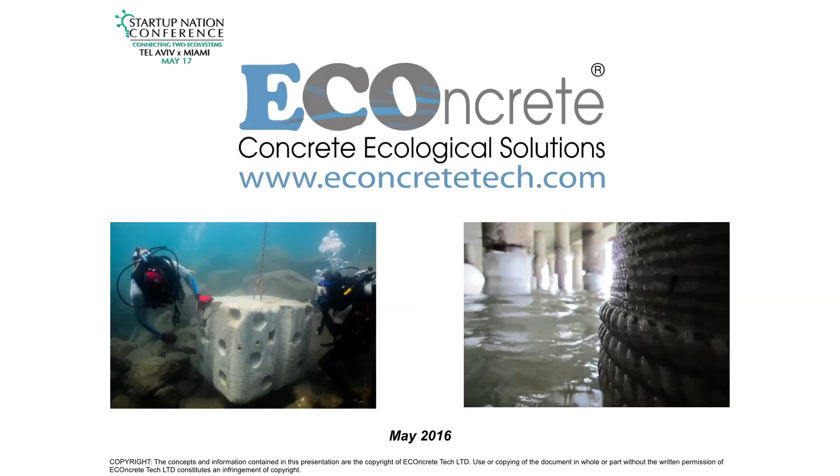So what we do, we are marine biologists, environmental engineers. My last company was Tel Aviv University. We all came straight from the lab, finished our PhDs in marine biology, working underwater in the lab. So we have no experience in business development. We opened the company, didn't have any clue about concrete, and we got into concrete completely by accident.

What we do is develop a technology that can harness natural processes for creating coastal infrastructure, which is concrete-based, that is more resilient and stronger, getting stronger with time, and actually acts as a natural reef. And we'll start with a short biology lesson.

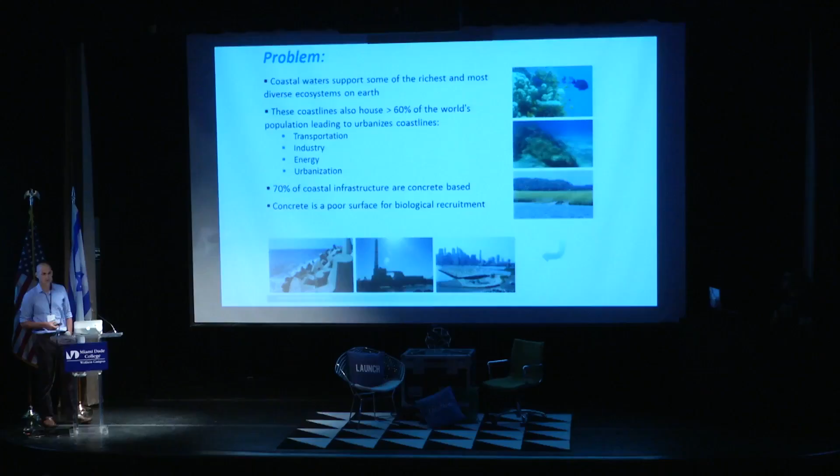So coastal water is the most rich and diverse ecosystem in the world. But 60% of the human population is living along the coastline, and they require infrastructure. And 70% of coastal infrastructure, if it's ports, if it's jetties, if it's breakwaters, if it's seawalls, is concrete-based. And concrete is a very, very poor surface for what we call colonization of marine organisms. And this takes us to two problems.

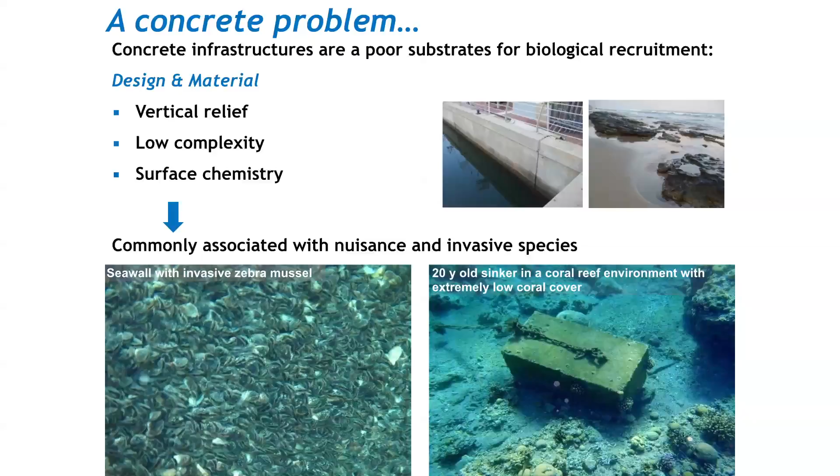One is the chemical properties of concrete are very basic. The pH of seawater is 8. The pH of concrete is going up to 13, which means that the little baby coral that swims in the water and touches the concrete surface is actually getting burned. And it's taking concrete something like 60 years to lose this basic surface and to start to promote biology. And that's the reason we only see biology, a healthy environment, developing on concrete surfaces only after a lot of years. And we usually see two options.

One of them, which is very typical, is what you see here on the right: a concrete cube that stayed in the Red Sea in front of the Marine Lab in Eilat in Israel for more than 20 years in the water. And it looks like someone put it in the water yesterday. And this is not an ordinary environment. This is the highest biodiversity in nature. Sorry. And it's just not getting covered by corals because they could not stay on the concrete.

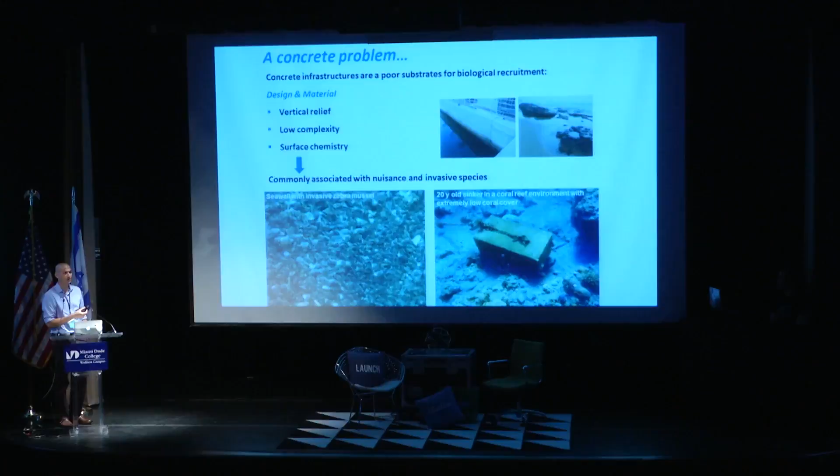On the other hand, what you see here is a seawall from the Great Lakes, the place where we are testing our technology, and they have an invasive species problem. And these zebra mussels are actually covering every surface. So nobody can sit on concrete unless you're strong enough, and invasive species, those are species that penetrate into the environment and make use of surfaces which are not occupied by other species. So the seawalls there, which are concrete-based, get completely covered by this zebra mussel, which creates huge damages in cost for infrastructure.

So what we do is we develop a technology that can modify the chemical proportion of the concrete and make it suitable for colonization of biodiversity and a lot of species. And those species, what they do is they put their skeleton on the surface of the concrete, and they actually create a reef, a biogenic rock that grows on the concrete and encapsulates it and protects it with time.

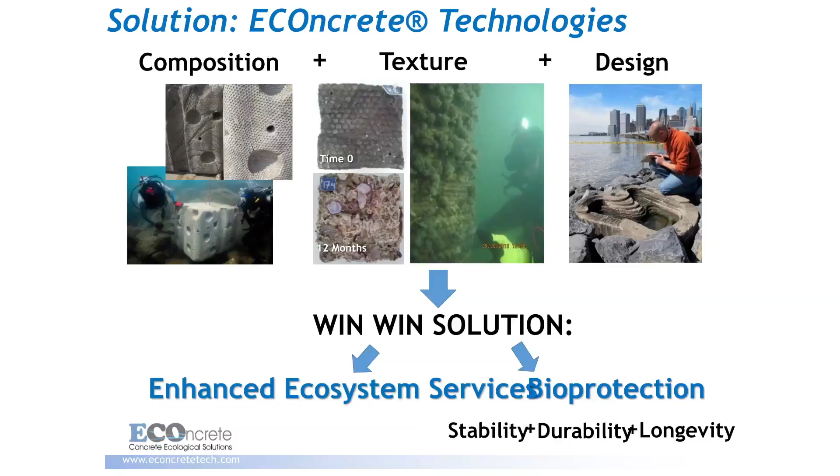What we do is we address issues of composition of the concrete, the texture surface, the microtexture of the concrete, and later on also design. So we get to a system or infrastructure that has enhanced ecosystem services, but at the same time has bioprotection capabilities. We're protecting the infrastructure with the biology.

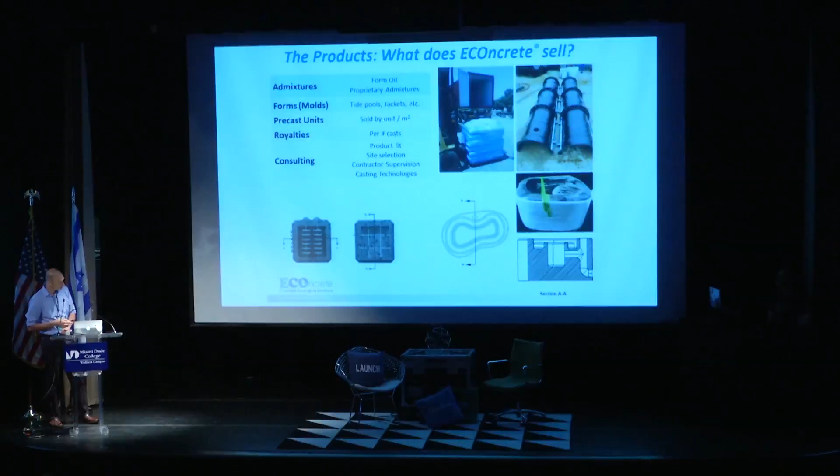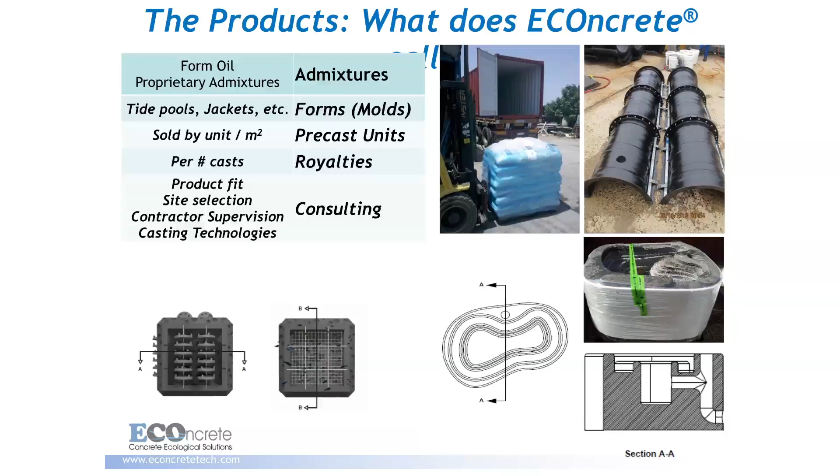Our business model is straightforward. We add salt and pepper to the concrete mix that change the properties of the concrete. We're not affecting any of its structural performance. We work with the clients and we get them the forms or the precast units themselves, and we're involved in consulting on the project from the beginning.

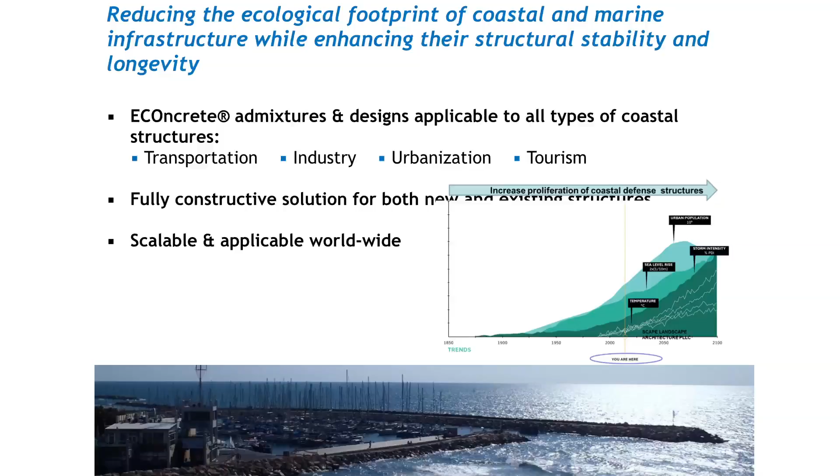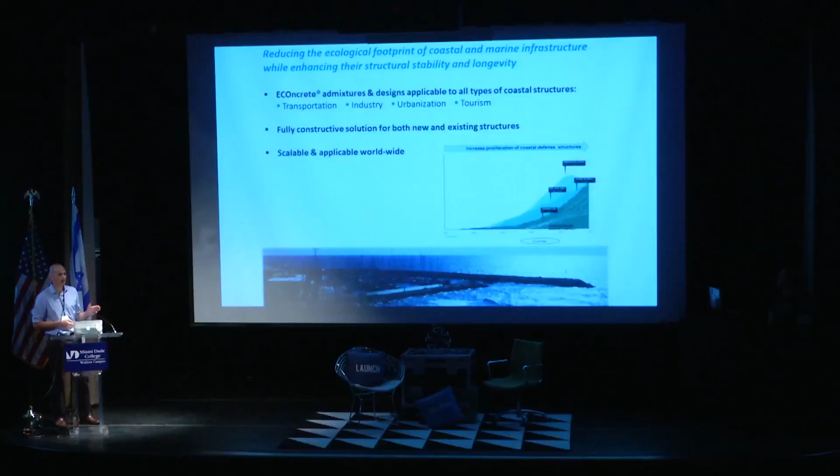And our market is worldwide. What you see here on the right is the statistics. There is increased storminess in the coming future, sea level rise. Urbanization is moving more and more into the shoreline, so the market is actually there, and in the last years, unfortunately, what we see is that 100-year storms that are supposed to come every 100 years, there were 3 in the last 15 years.

And how do you launch a product like ours into the market? Slowly. Very slowly, and this is the way we started. So after we did a verification, and after we did the research and development that took 2 years, we knew that we have concrete mixes that work well, so now you need to show that they perform.

And what we did is, sorry, everything is running. We teamed up with the Army. They built a new port in Israel, and the Army actually used our technology to create the bottom part of their breakwater for this new port.

And we actually showed that in 2 years, those are our units on the top. The lumps that you see are oysters. They're starting to cover the concrete. So we create a unit which is structurally reinforced, creating the breakwater, getting stronger with time, and filtering the water within the port. So this was the first project.

Everything was published in peer review. We came from the academy. The thing that we know how to do is write papers. So on every project that we do, we write a paper.

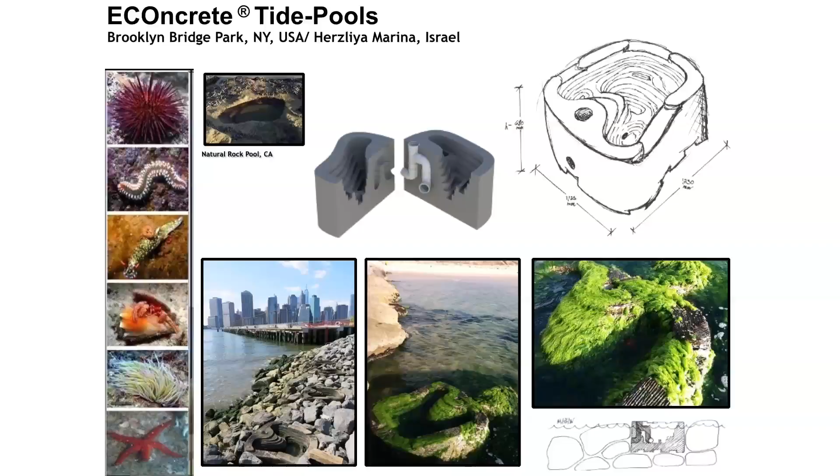It's a park on the Brooklyn waterfront, and there we created a revetment system that supports the park, but it's actually biologically active. So instead of just putting rock, we put in our modified concrete, and very fast we can have fish larvae there, oysters, crabs that were not seen in the area for the last 25 years came back in simple units that are made of concrete and support the shoreline.

And we do the same on marinas, and this is, for example, a product that we're developing here for the Florida market. Those are seawalls. Seawalls that get covered with biology and filter the water in the marina. We can do it right now, and this was installed in Herzliya, but is now in the process of being installed in Key West.

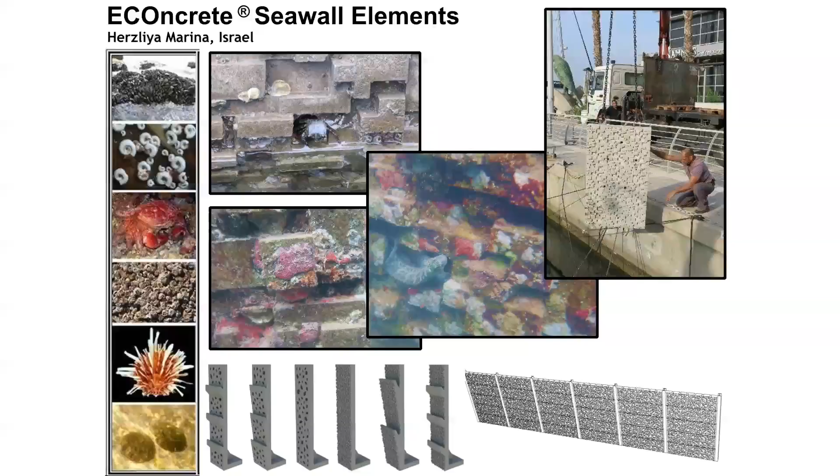And this is how we actually got into a large project, and this is something we never thought about. It's a product that came from the clients, became one of our biggest sellers, and it's all starting with worms. So when we showed our technology in New York, a manager from one of the leading marine engineering companies came to us and said, well, it's very nice, your technology, but we have a huge problem here.

The water quality on the Hudson River went up. Because of the Clean Water Act, everyone is happy, but who's really happy are the marine borers. They came back. And the entire waterfront system of New York is based on wooden piles. And those wooden piles, for the last 40 years the water was so toxic that there was nobody to damage them, are now eaten by marine borers.

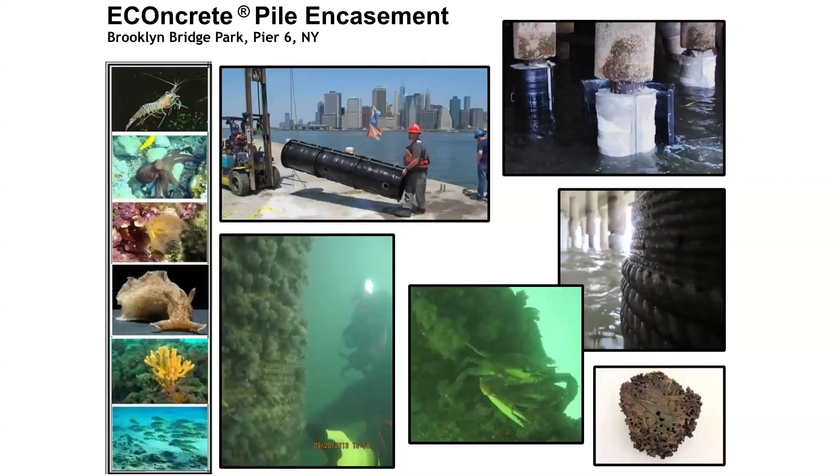And they are getting rotten and full of holes, and what you see here on the right is a slice of one of those piles that hold the piers; they got completely eaten by worms. So the system is now to encapsulate the wooden pile with a load-bearing system made of concrete that becomes actually a concrete pile. And this is a massive market there, and they were asking for our solution.

And what we did is in 6 months, we adapted our technology to be cast underwater. All the casting is done by divers. We developed in Israel in 3.5 months a system of forms that can be attached to the piles underwater by divers. And we actually initiated a project of replacing the existing technology with our technology and creating pier piles which are stronger. The divers from the union can cast them really easily with the same method they cast any other concrete structure there, but it also gets stronger with time and gets a cover of biology that protects it.

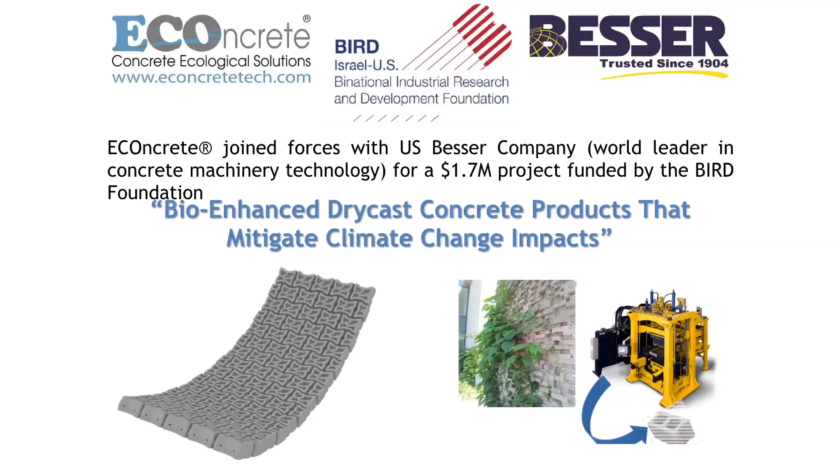We're doing mega structures. But at one point, we understood that we need to shift the system and how we approach the market. And what we did is we teamed up with leaders in the industry. And one of the leaders of the industry is Besser Company, which manufactures machinery for concrete casting. And we teamed up on a project with them in order to take our technology to the next step, and this is to mass production and to be a commodity.

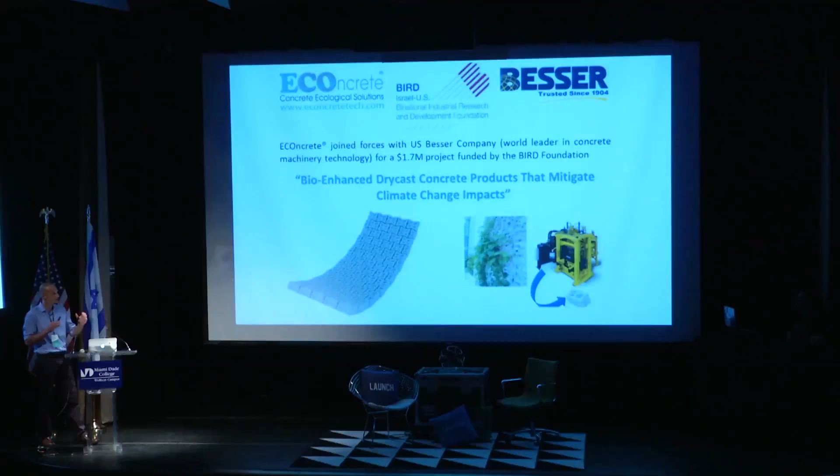And the first product for this joint venture is going to be installed this August here in Florida at Nova University in Fort Lauderdale. And those are actually units to stop beach erosion. And they are made by block machines, the most common machinery for concrete casting. And it's actually taking us to the next step of getting our technology available not on a project base, but for any client that wants to build a seawall or any municipality that wants to use an off-the-shelf product.